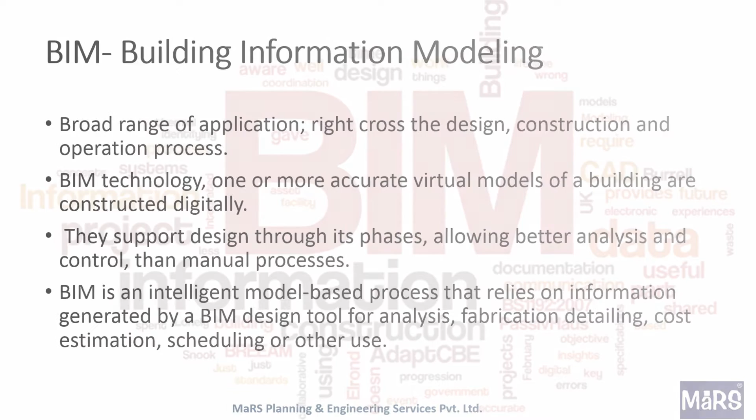MaRS BIM and other services. MaRS Group has been working in sectors like buildings and industries, water and wastewater, roads and transport, urban and regional planning, material testing and investigation.

We provide services like survey and soil investigation, architectural and structural design, tendering and estimation, third-party inspection, construction supervision consultancy, project management consultancy, material inspection. In year 2012, we came up with the idea of BIM building information modeling and developed a separate department for BIM services.

In BIM we do offer services like 3D modeling support, coordinated construction support, facility management, BIM implementation and 4D simulation services.

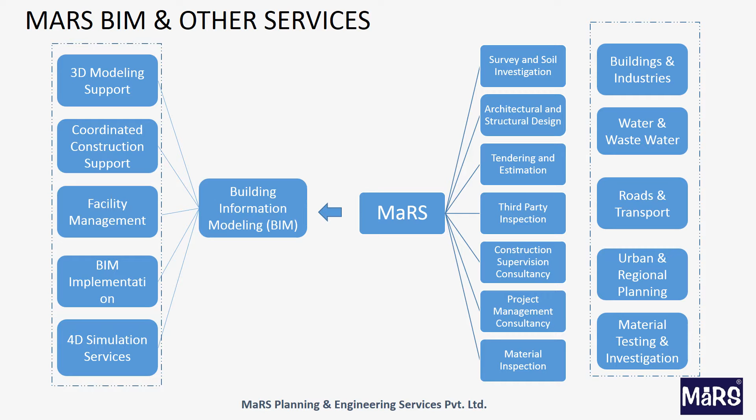Conventional PMC process: project management is a continuous process which needs to be efficiently carried out to achieve optimum use of cost, time and resources.

There are 6 verticals of project management which start with project scheduling, procurement, cost control, document management, field management and data collection. Depending on speculated life cycle of the project budget and availability of the resources, master schedule of the project is prepared.

It is important to specify milestones in project execution along with the tasks involved. All tasks have flow of work and interdependencies with specific quantum of time and resources noted in master schedule. Such master schedules need to be updated daily to manage project activities.

It gives early alarms for delays, procurement, etc. Timely procurements need to be carried out knowing the time to delivery. Master schedule is rechecked for its correctness.

Quality assurance and quality control are two major supports of the project, fixed up time to time throughout the project duration. It ensures safety and quality of a project.

Along with QA and QC, it is essential to maintain field records like cement register, steel register, labor record book, etc. Maintained data with result and reports need to be shared with the client to make the client aware of the project management affairs.

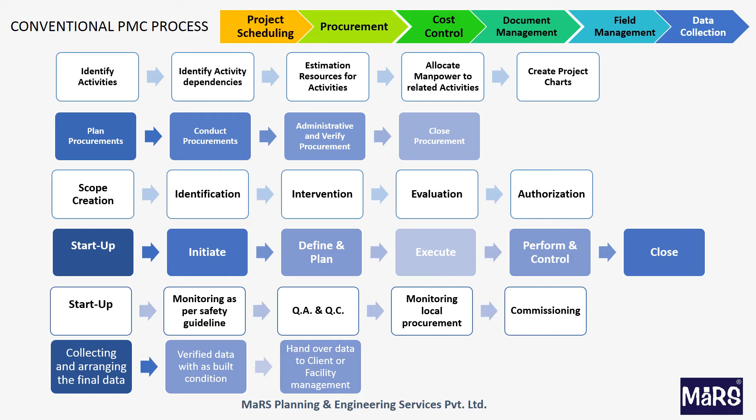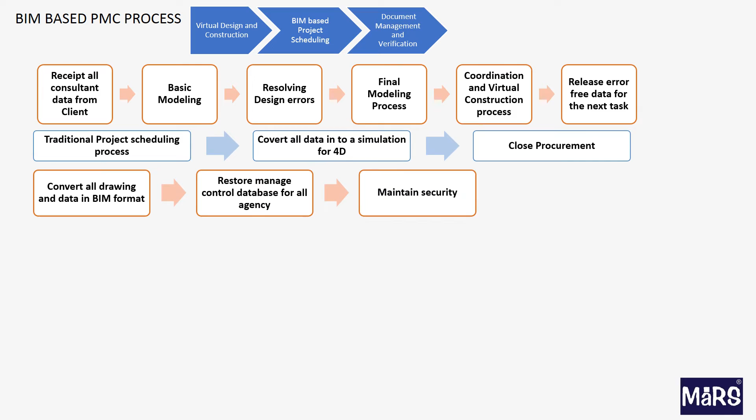This process is similar to virtual construction. So at the same time, we find the design errors and conflicts. With help of the consultant team, we sort it out.

After this process, our construction data will become more specific and accurate. Based on this data, we start the virtual construction process.

BIM-based project scheduling: for this task, our initial process is same as the traditional project planning stage. We revise our model as per the project plan.

The model is able to assign the phases of construction, which can be helpful to us in 4D modeling.

After completion of this process, the planner is able to prepare a 4D model, which will be ready for on-site weekly updates. This 4D model can compare actual versus planned progress, document management and verification.

For better document management, we update all data in one format. So all data will be available in a single model, and this data is placed on a cloud-based server.

This facility can be managed for easy accessibility, security, and improved review cycles. So all appointed agencies can review their requirements. The verification process will improve, and the execution team will get final and accurate data.

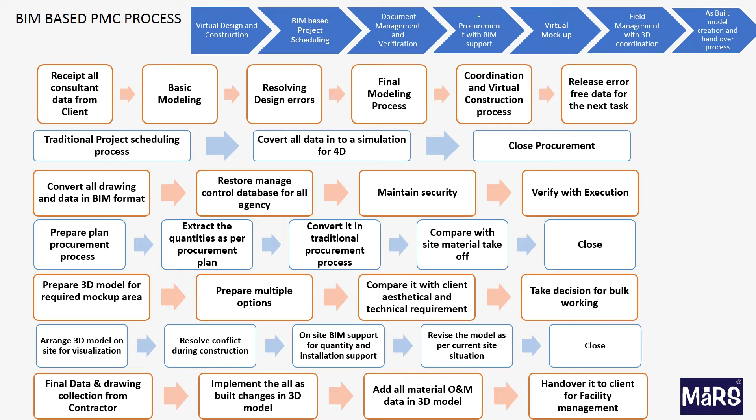With better visualization, the team is able to define and resolve the conflict areas of the building. Also, they can find the revised quantities and remaining changes in the further process.

This way, the design and PMC team will get final and accurate as-built drawings from the model.

As-built model creation and handover process. This task is very important for the building life cycle. The team collects all as-built data from the different agencies, and they convert it into one single model.

This model will help in the operation and maintenance process. So this model will be handed over to the client or facility management agency.

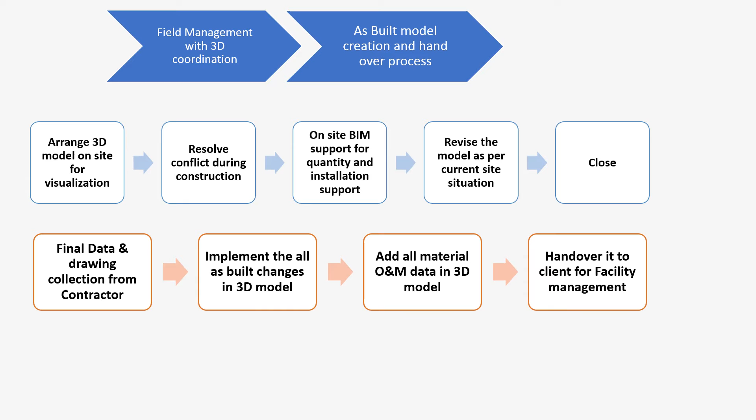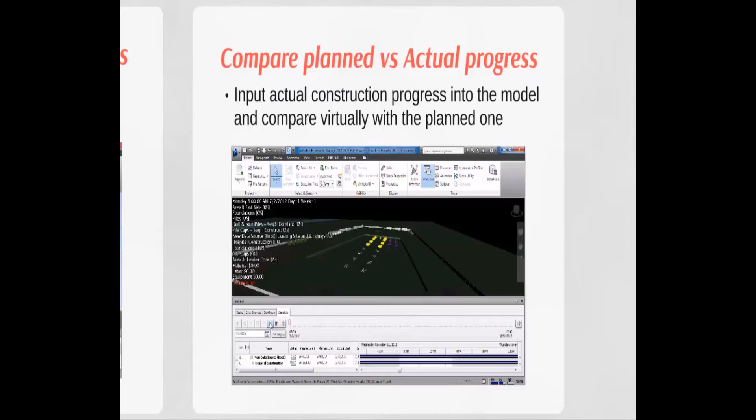Planned versus actual progress. The video shows how 4D simulation can relate actual progress to planned progress of construction, and we can manage to see the progress, delays and differences.

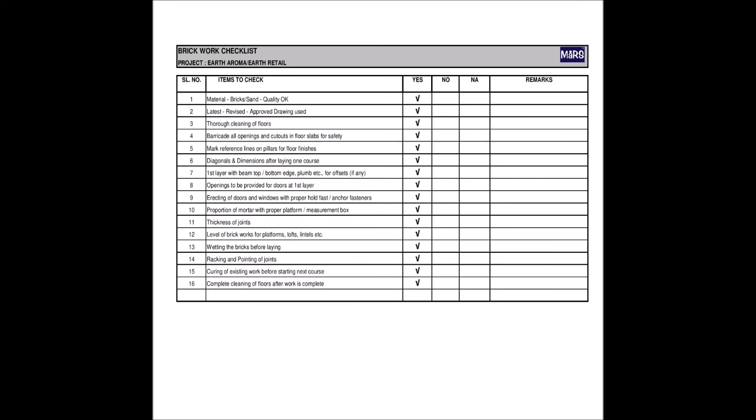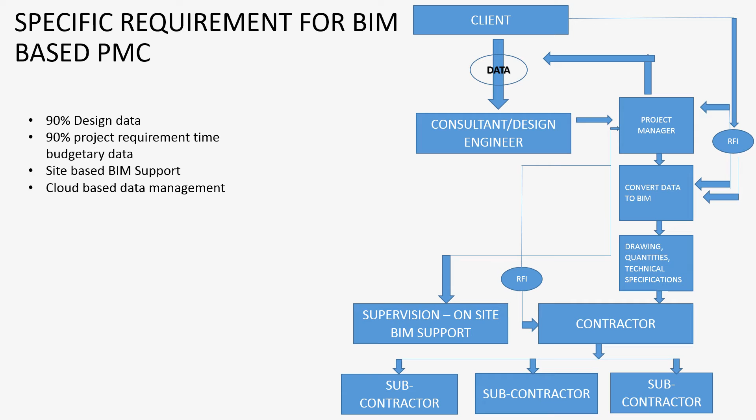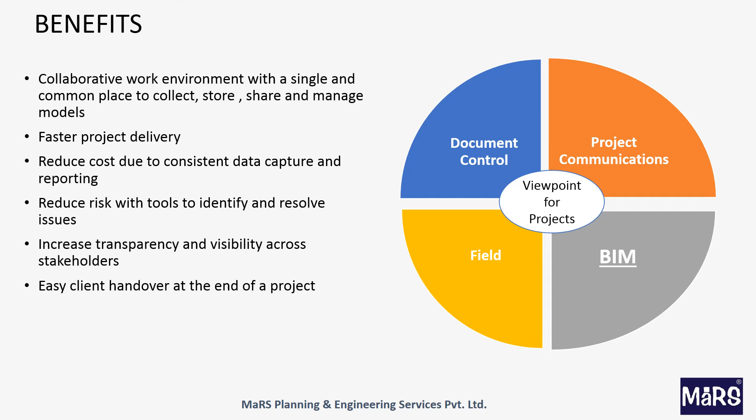Reduced risk with tools to identify and resolve issues, increased transparency and visibility across stakeholders, and easy client handover at the end of the project.

Virtual design and construction phase benefits are: raise the accuracy in design, minimize design revisions, minimize design-based delay in design approval, and improve the approval cycle.

BIM-based project scheduling benefits are: 3-dimensional visualization in project scheduling, and at a single time one can manage multiple sites from a single location.

Easy and fast actual versus planning comparison, resolve conflict between tasks, avoid delay, document management and verification. Benefits also include improved review and approval cycle, easy data sharing, minimized paperwork, quick data availability, secure database, and good backup option.

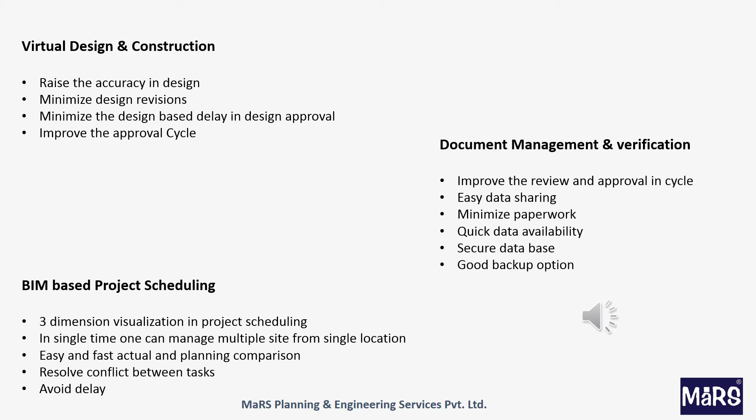E-procurement with BIM support benefits are: cost saving in material takeoff, construction phase quantity takeoff, improved transparency in procurement, and minimized rework.

Virtual mock-up benefits are: minimize time in mock-up preparation, minimize cost for mock-ups, multiple option availability, and instant solutions for technical and aesthetic related queries.

Field management with 3D coordination benefits are: minimize rework on site, time saving in drawing review cycle, avoid delay for coordination matters, and improve building life cycle maintenance point of view.

As-built model creation and handover benefits are: raise accuracy at the as-built data, 3D visualization for maintenance, improve building life cycle, and easy maintenance.

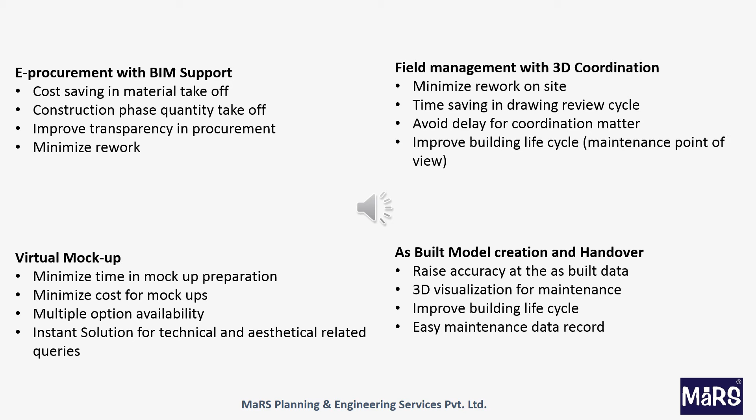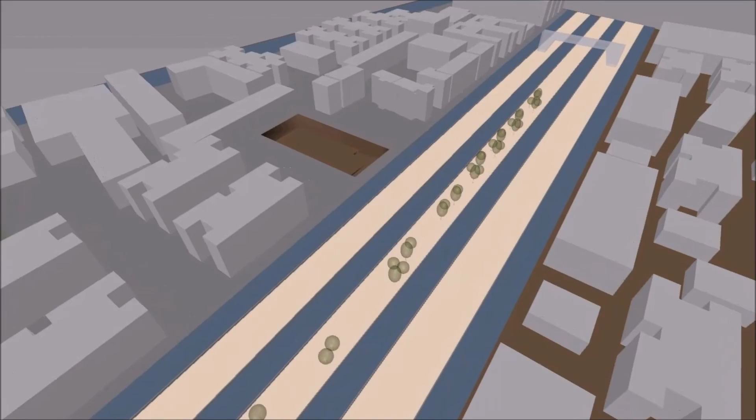Case study: this video is a simulation video of one of the projects in Mexico. This is a residential apartment in Mexico which we worked on using the BIM platform, and the video is a 4D simulation of the project showing the construction sequence as per the project planning.

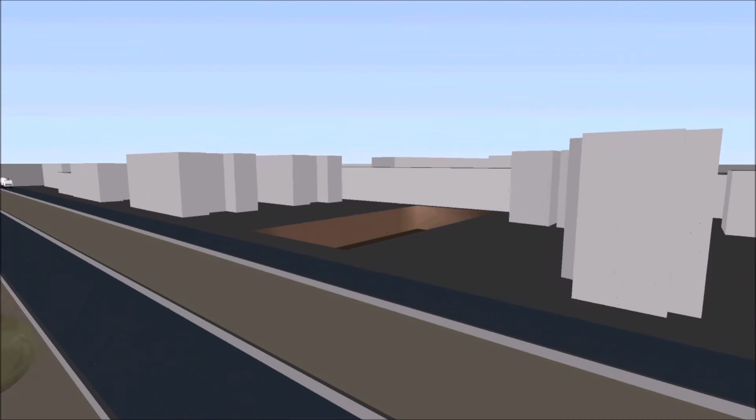This is a 360 view of the project showing the architectural services as well as other services. The simulation illustrates how conventional drawings are modeled in Revit software, and BIM-based detailed drawings are the outcome of it.

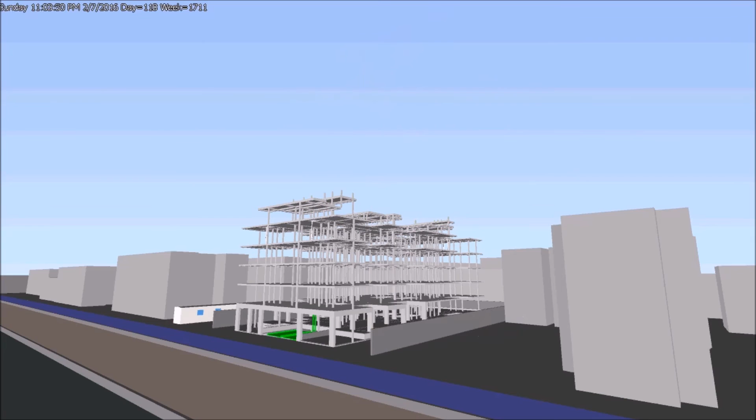Conventional drawings are the input drawings which we receive from the client or consultant. The BIM-based drawings are the outcome of the data, detailed and described as good for construction drawings.

This virtual construction model allows a built-in quantity takeoff feature which allows us to effortlessly generate quantity takeoffs without the hassles of on-site quantity surveying.

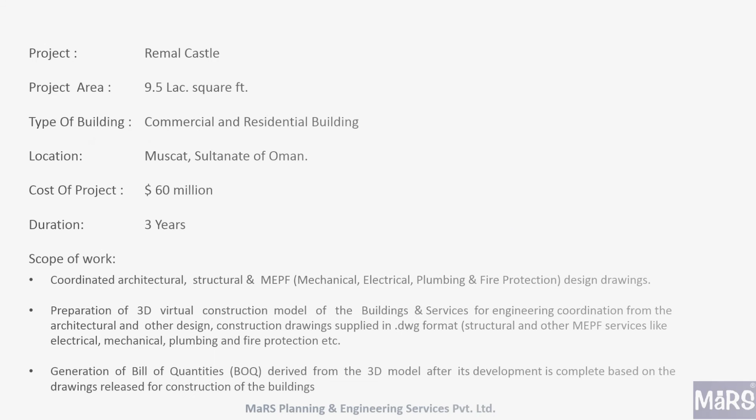The project shown here is a commercial and residential building in Muscat, Sultanate of Oman. The project scope of work and images are shown here.

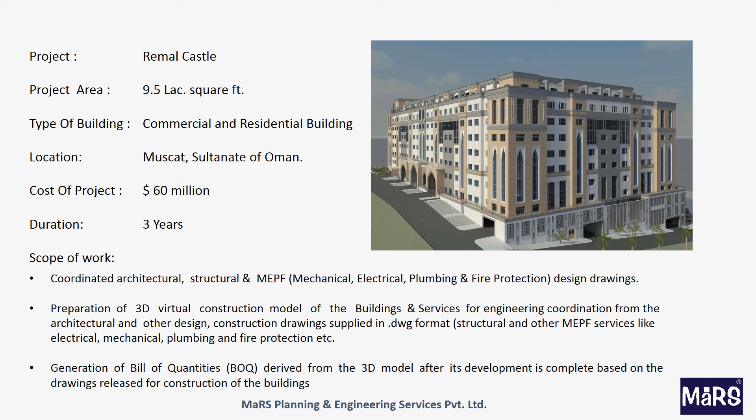Benefits of using our service: increased building performance and quality, improved collaboration using integrated project delivery, generation of accurate and consistent 2D drawings at any stage of the design, better management and operation of facility, integration with facility operation and management system, and clash detection and coordination.